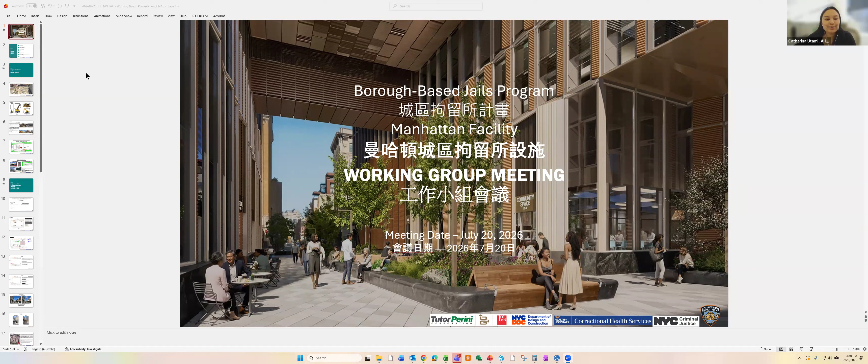We'll get right into it. First, we'll start with the project status, where we are, then look at the next 3 months and where we're going with the project schedule. We'll talk about the water table and addressing that safely, safety overall, environmental monitoring, and we'll introduce our independent monitor with Excel.

Starting with the job site, this is what the project looked like as of last week. Right now we have 3 large drill rigs installing secant piles on the northern end of the project, to the left of the screen. To the south is to the right of the screen.

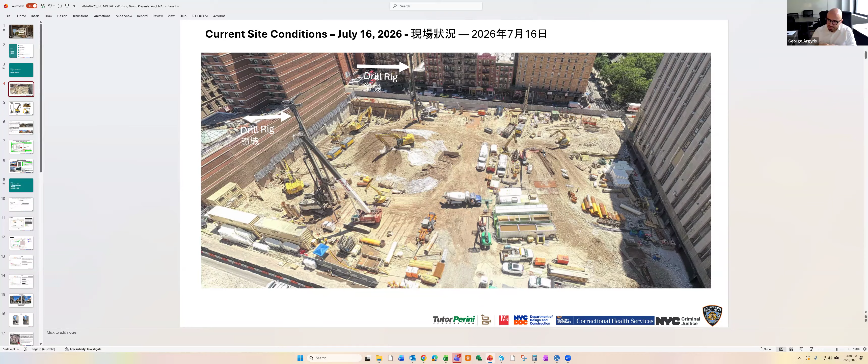Along with that, we're doing some other preliminary exploratory work around the site. These are some examples of the large equipment we have on site: drill rigs, assist cranes, loaders, and excavators. These are the major pieces of equipment.

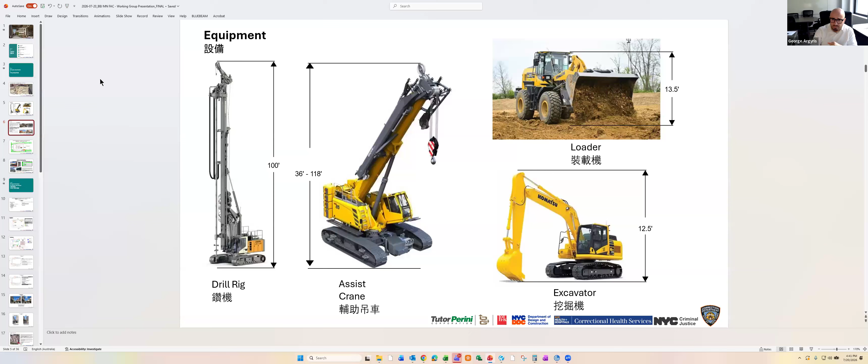The most notable deliveries being made are the early deliveries, which are constrained by DOT stipulations for crossing bridges or the weight of these loads. They consist of core beams, which go inside the secant piles, casings, same situation, and of course concrete deliveries, which go inside the secant piles and come throughout the day during our permitted working hours.

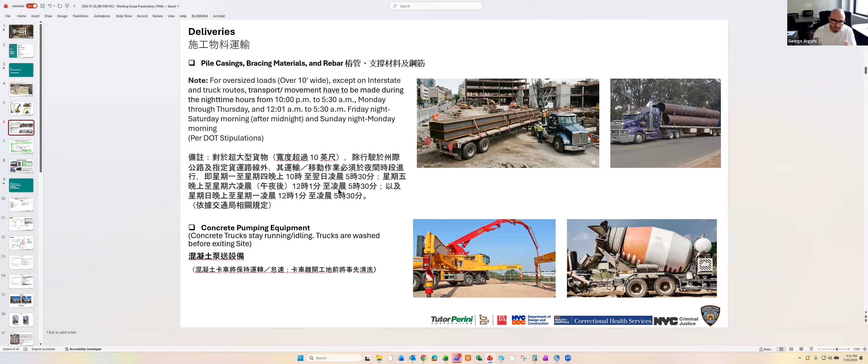Looking at the site conditions and layout, no major changes since we last met a couple months ago, with the exception of the northeast area, south of Chung Pak. We are adjusting the entrance gate into the site to accommodate Chung Pak's concerns about traffic and the proximity of construction to their site. We're shifting that fence down about 70 to 80 feet, and by tomorrow we should have this gate installed.

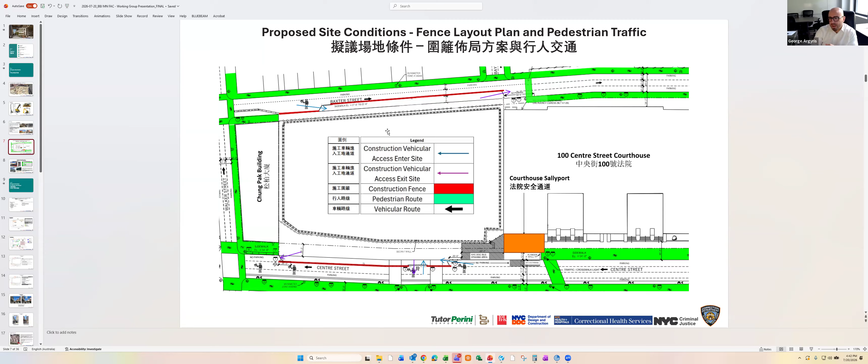Other than that, business as usual. We have the courthouse to our south, and their temporary sally port is continuing operations. We have our Centre Street entrance and exit here on these gates, and everything else remains as previously discussed.

One major change worth noting, other than the Chung Pak gate, is that we're replacing these orange and white Yodocks with concrete jersey barriers. You can see samples at the bottom of the screen. These provide greater stability and resistance to high winds, since we have sound blankets on top of these fences creating higher pressure and more tendency to lean over. We've already replaced the Yodocks along Baxter Street as of this weekend, and next weekend we'll do the Yodocks along Centre Street.

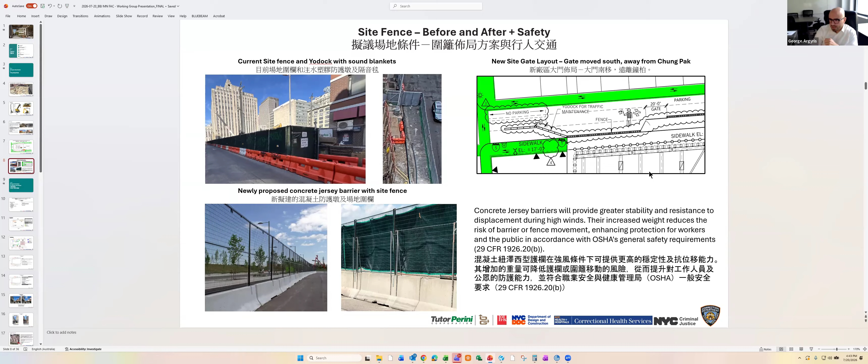Looking at the next 3 months, we're going to continue secant pile drilling similarly to now, removing some remnant foundations conflicting with the new secant piles and some foundation elements of the new building, along with excavation as we start going lower into the elevations, plus some miscellaneous work.

We're going to be removing some light poles, one on Centre, one on Baxter, which should happen in the next couple of weeks. And of course, the courthouse emergency exit, which I'll show in more detail coming up.

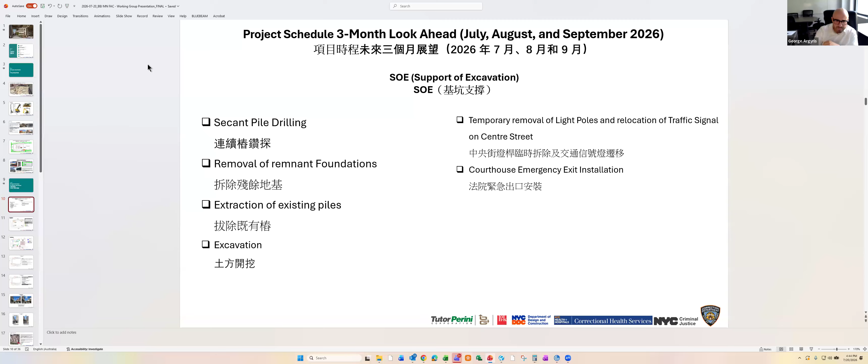When we talk about early SOE work, this consists of removing some conflicting remnant foundation elements from the old detention facility. The priority areas are the 4 corners, which we've completed about half of by now on the northern end, and we're now moving to the south.

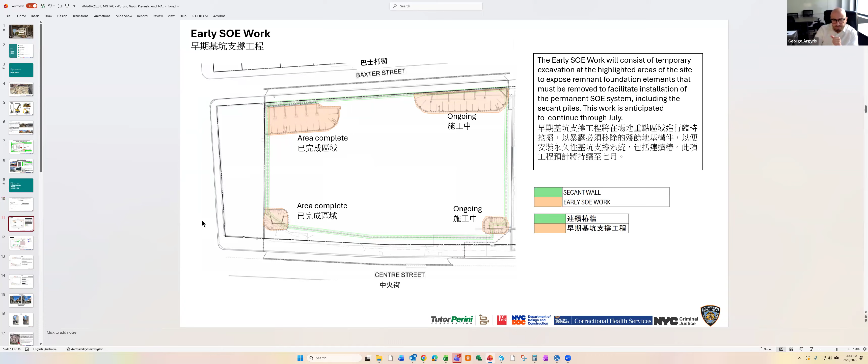Secant operations are continuing. You can see the 3 drill rigs we mentioned earlier. This is more of a cartoon in time and will get more detailed as we continue operations with caissons in the future. This is just showing you where we are at the current moment.

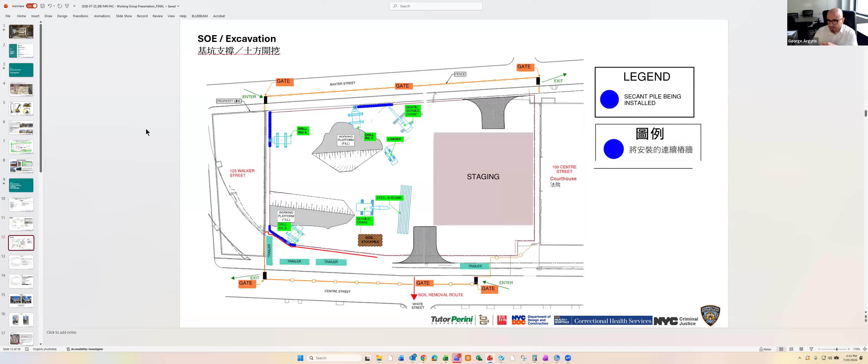Moving further down, a couple other items: we have some fire hydrant relocations to complete. We have these approvals in hand and are just coordinating with site operations as to when to conduct this work.

On Baxter, we'll relocate this hydrant across the street, and on Centre we're going to relocate this hydrant further north, to help our site logistics and safety for moving vehicles. This should take about 3 to 4 weeks total, though we're going to try to do it quicker, about a week and a half on each side.

This is just addressing the fire hydrant relocations that are going to happen.

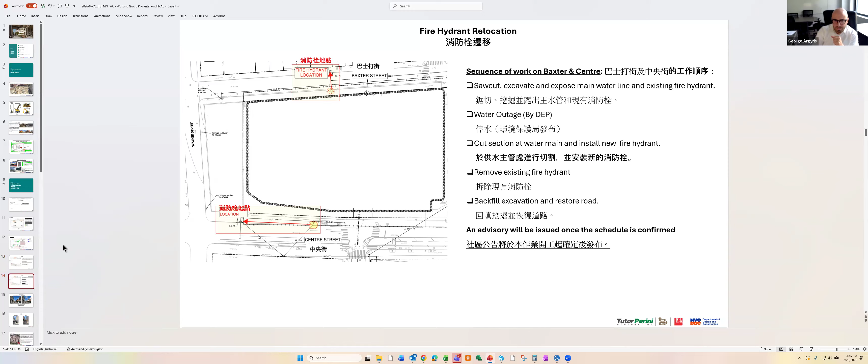In addition to that, we did mention some light pole relocations. We also have some traffic light removals and modifications that we're going to make.

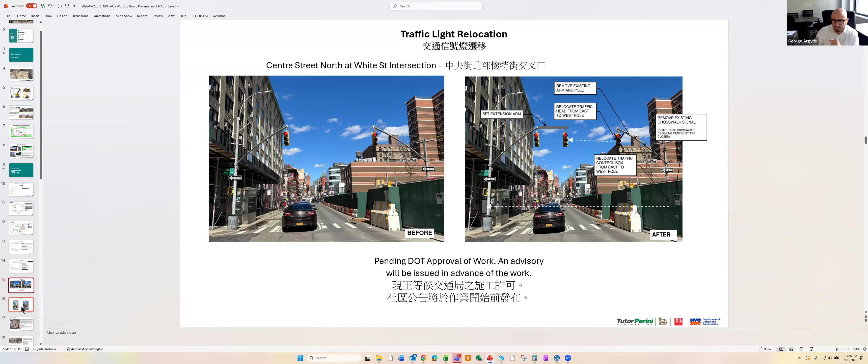And we did mention the light poles. These will be removed in the next couple of weeks, maybe sooner, pending Con Ed coming and removing the power to these light poles.

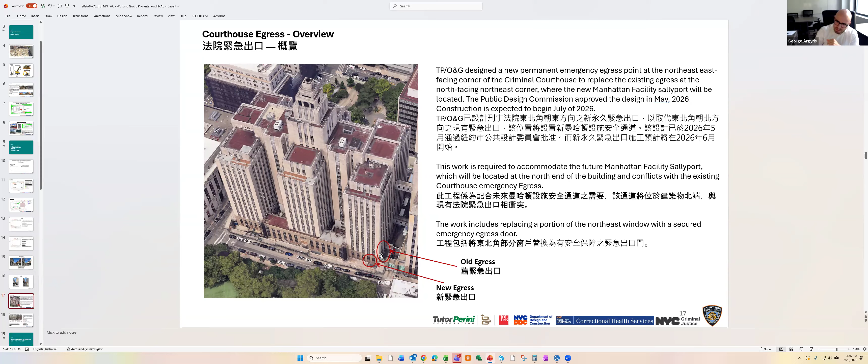Let's go a little bit more in detail here. So what we'll do is we're going to take one of the existing windows and install a door there that will look very similar to the other doors on the building architecturally. This was approved by the Landmarks LPC, Landmark Preservation, and of course PDC as well.

So that work should be starting in the next week or two. It should take about 3 months to complete. We do have to work night shift for a good portion of this work to coordinate with the operations happening in the courthouse. But of course, we'll put up sound blankets for the noise. We're going to have HEPA filter vacuums and other mitigation measures for any dust that's created in this area.

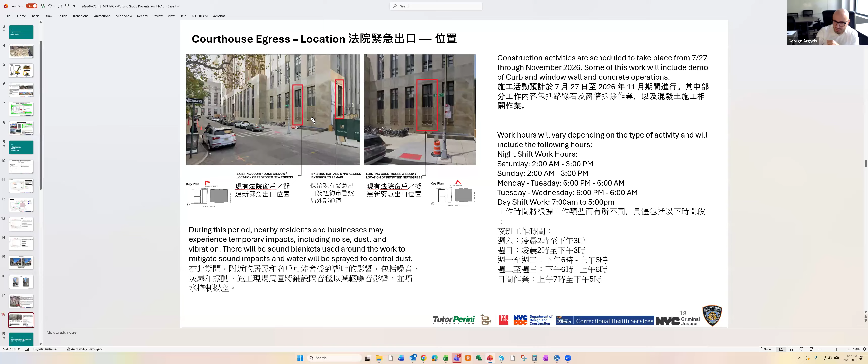Moving forward, safety. This is a very sensitive topic to the construction engineering team and the community, of course. So let's talk about the secant pile wall and what that looks like.

It's basically made up of a series of secant piles which are overlapping. Every other pile is reinforced with concrete steel, these large steel beams that go in, and that gets filled with concrete. This creates a rigid boundary that ultimately creates like a bathtub or isolates the footprint of the site from the water table.

And what the water table consists of, if you can imagine the earth being a sponge for simpler terms, the water table is really saturating the parts of the ground, and it has a more or less stable elevation. What we need to do on our site is excavate deeper than where the water table is. So what we're going to do is isolate that with these secant pile walls.

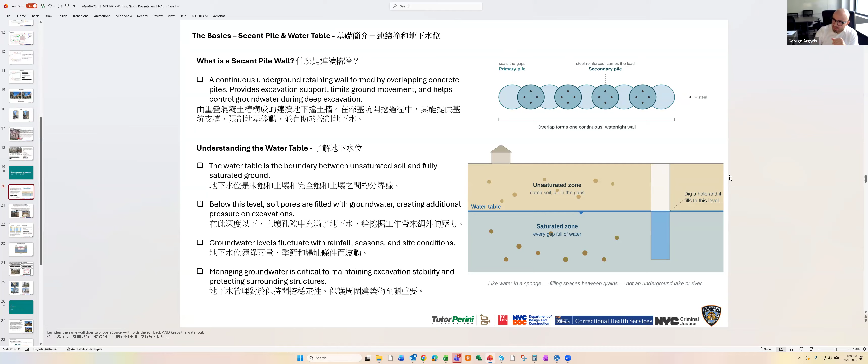You can see here, this graphic shows you how we need to excavate deeper than the saturated zone here, and how we do that is we install these secant walls. These are some examples. What you see here is after these walls are installed and the excavation has continued further down to expose these walls and enable the team to work inside of this. You can see some bracing here that's used to secure the walls in place.

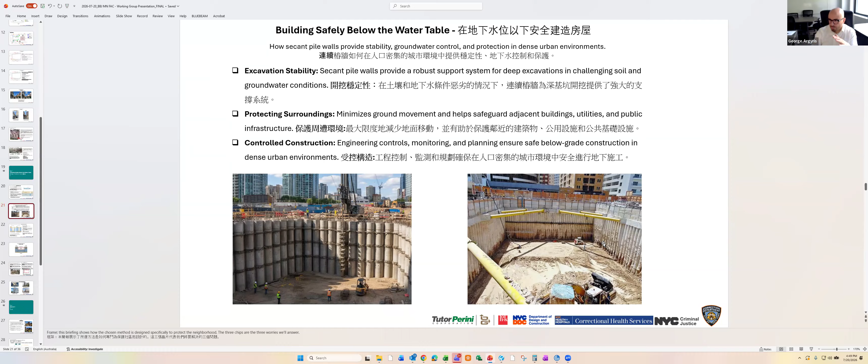So that's in essence a high level explanation of what that is. Some additional graphics here to help you understand.

So if you want to dewater or draw the water table lower without secant wall isolation, what would happen is the water would draw down kind of like a cone. So that would create some settling in the surrounding vicinity.

What we're doing here is isolating the system, maintaining the natural water table to its elevation and drawing it down. Of course, the water table will fluctuate naturally. It can fluctuate due to heavy rains. In our case, we have the transit tunnel next to us, and sometimes they pump water out, so they might make the elevation of the groundwater go up a little bit.

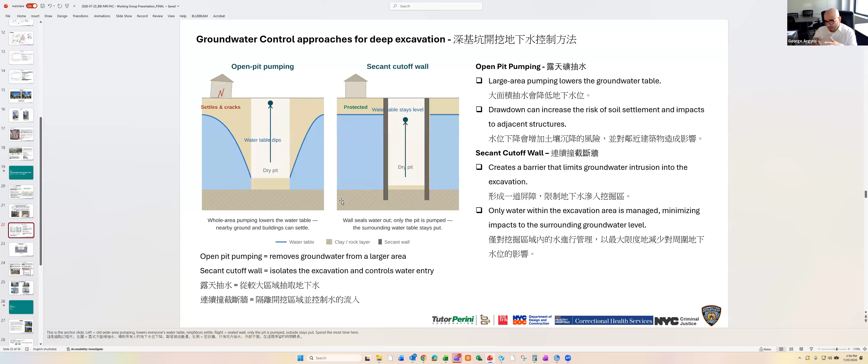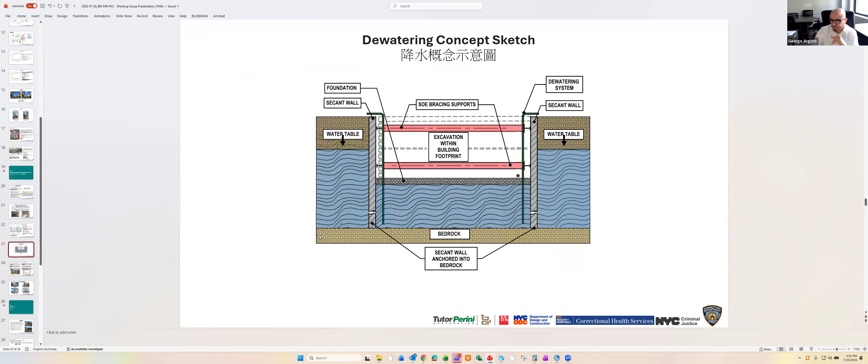But we're monitoring, we will be monitoring both from inside and outside of the site. The water levels, you can see here, this is a little bit more detailed graphic where the water table stays pretty much static in this condition, and then we draw down. We have monitoring inside and outside, so that's the concept there.

And how do we protect the project and the community? We put the wells, of course, we monitor the groundwater levels. We also monitor movement of the adjacent buildings and vibration.

So we have a pretty thorough plan in place that is reviewed and approved by DOB and Transit. When we talk about dewatering, it's DEP, the DEC, Department of Environmental Conservation. So all these plans need to be approved before they're even put in place. So we do have all those approvals, and we're proceeding likewise.

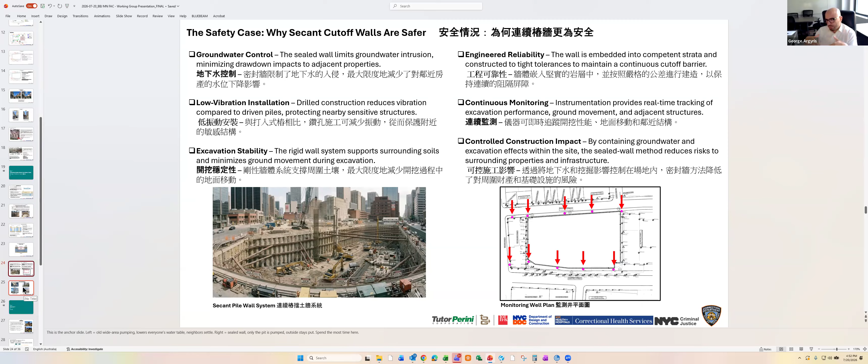So the plan is to start installing these wells at the end of the year to establish a baseline of where the groundwater table is, in addition to previous exploratory work that we've done. Once we establish that, we'll start drawing down the table and excavating. That will be in early 2027. Of course, Manhattan, being a majority of it, especially downtown, being built on top of water and the river, there's similar projects.

The Gateway Tunnel project has a similar setup, and 4 Hudson Square project, 100 11th Avenue in Chelsea, and of course 120 Fifth Avenue. So these are just some examples that have similar secant pile wall systems.

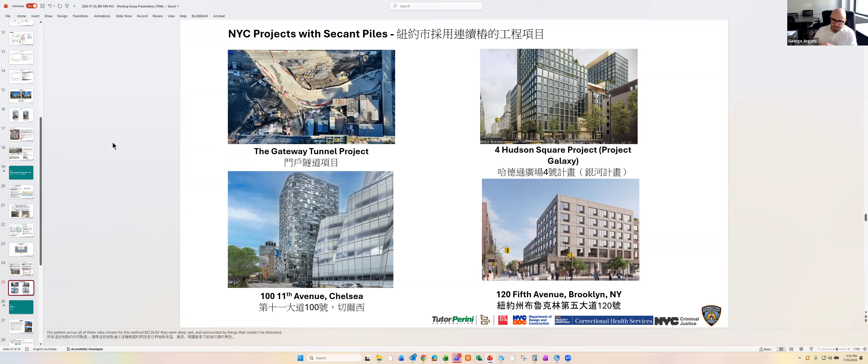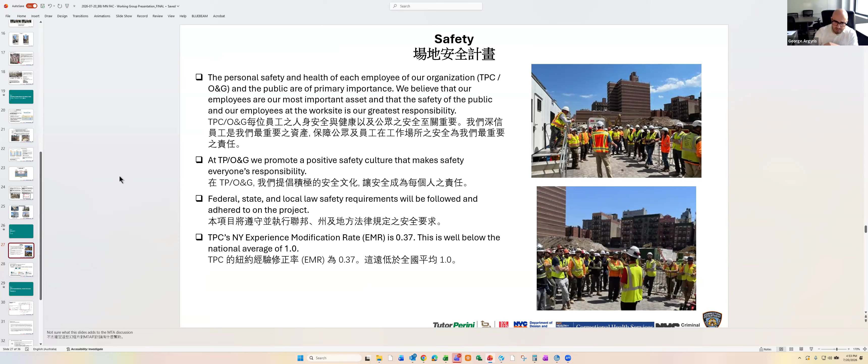Talking about safety, we take safety very seriously on our jobs, and it's really up to not just the superintendents, the project managers, engineers, it's anybody that steps on site from our company and our visitors. We orientate these folks when they come on site. They get some training, and it's everybody's responsibility to really observe and raise the flag if they see any unsafe conditions. As a matter of fact, just to confirm some follow-ups from previous meetings.

There have been some isolated incidents that were referenced in the last meeting in terms of Brooklyn, but we just really want to emphasize how serious we are about safety. Our New York, Tutor Perini's New York, independently verified EMR record is 0.37. Nationally, it's 0.65. We're looking at about a 1.0 average, so we are well below the national average here. This is a rating that's verified independently, through what insurance process goes to set that up. So just wanted to highlight that.

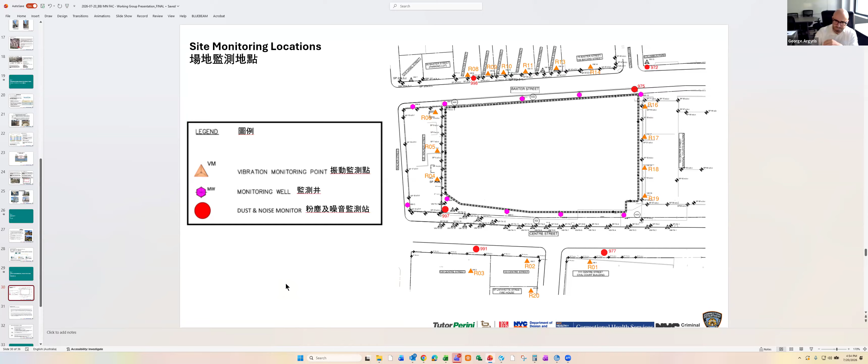In terms of the monthly environmental report, TP/O&G issues this to DDC on a monthly basis, and that gets released to the public, which is on the DDC's website.

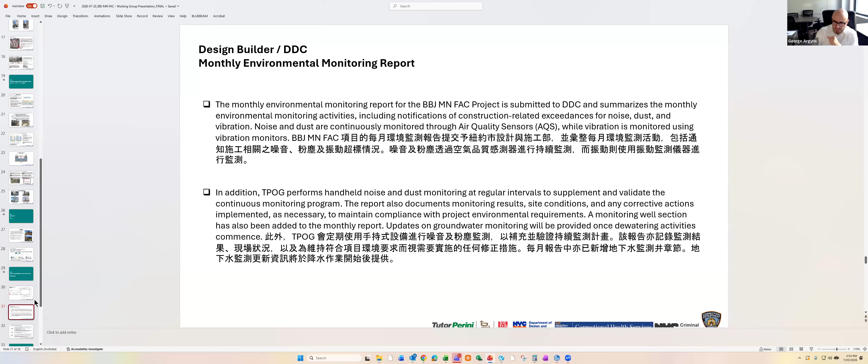Just some recap for June for our report. For noise monitoring, we had 186 instances of noise exceedances. Out of all those, 138 were recorded outside of working hours, so there are noise levels that exceed the 85 decibel per day and 75 per night outside of construction. For the remainder, a lot of these were happening during rush hour between 3 and 5 p.m. It was determined that a lot of this was coming from either increased emergency vehicles or just a higher level of traffic, and you can see that detail in our report.

For dust monitoring, there were no exceedances for the month of June. And for vibration monitoring, we had just one exceedance at the courthouse to our south, and that was just an anomaly. We double checked against the other 3 vibration monitors in the building, and we didn't have any issues. So that was an anomaly that we picked up there.

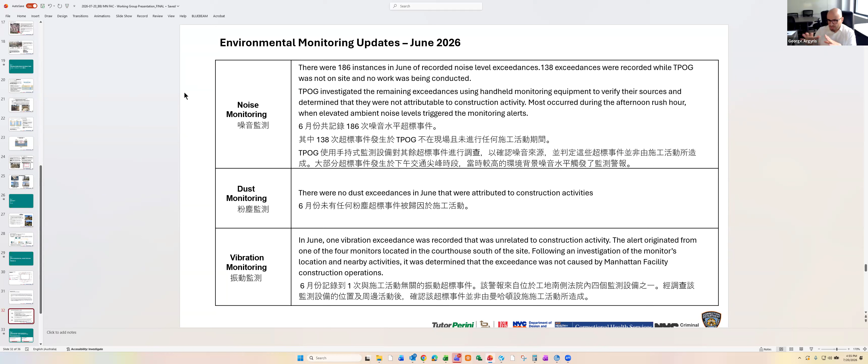I'd like to take some time to introduce Excel, our independent monitor. Please feel free to jump in. Hey, Laura, you please feel welcome to start your introduction of your team. Maybe share the scope of your work, especially compared to the scope of the Excel team during dismantling, and just share with the community what your plans are.

Sure, thank you. Good afternoon everyone, and nice to see the ones that I've been working with before on the dismantling phase of work, towards the end of that phase of work. So we're happy to be on board. We did have our in-person kickoff meeting last Wednesday, and we are now on site as of Thursday morning. We have a project scientist on site during the entire time of the work going on. Right now the schedule is 7 a.m. to 6 p.m., and we are monitoring with handheld instruments for particulate matter, including PM10 and PM2.5, taking separate readings, as well as total volatile organics and noise.

So we have the instruments for all 4 of those parameters, although the PM2.5 and PM10 has to switch off and on because it's the same instrument, but just different attachments. So we have to go into the trailer, switch it off, go back out.